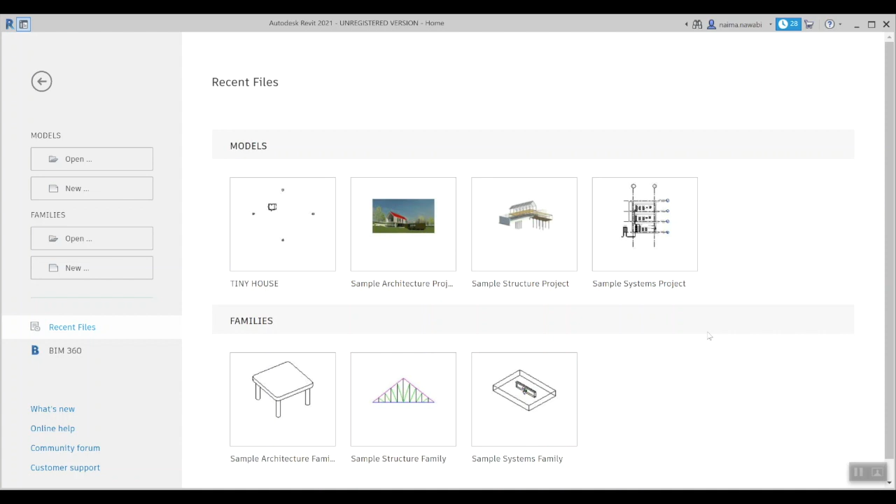I'm going to go back to our tiny house example, and everybody's tiny house is going to look slightly different. Specifically, if you look at our elevation markers, I'm kind of over here in this quadrant. You could be dead center, you could be all the way over here. We're all going to be a little bit different, but that's okay.

What I'd like to start out doing for printing is to show you guys how to add a sheet to the project. Over here in our project browser, if you pull down, you'll notice a new category called Sheets, and there are no sheets right now. If I go ahead and right-click on where it says Sheets, you'll see that new sheet comes up. So again, from the project browser, scroll down to Sheets.

There's no plus sign because there are no sheets. No sheet, man. Haha, sorry. I'm not though, I'll say sorry, but I'm really not. I'm shameless when it comes to my horrible jokes.

So right click and then new sheet. Right now we have one option, and this is called an E1. When we look for our paper size, remember size E is a 30 by 42, a really standard large size of paper. Another large sheet many of you probably use, maybe in CAD, is the Arch D, which is 24 by 36. But right now we're going to be using the Arch E. I'm going to click OK on that.

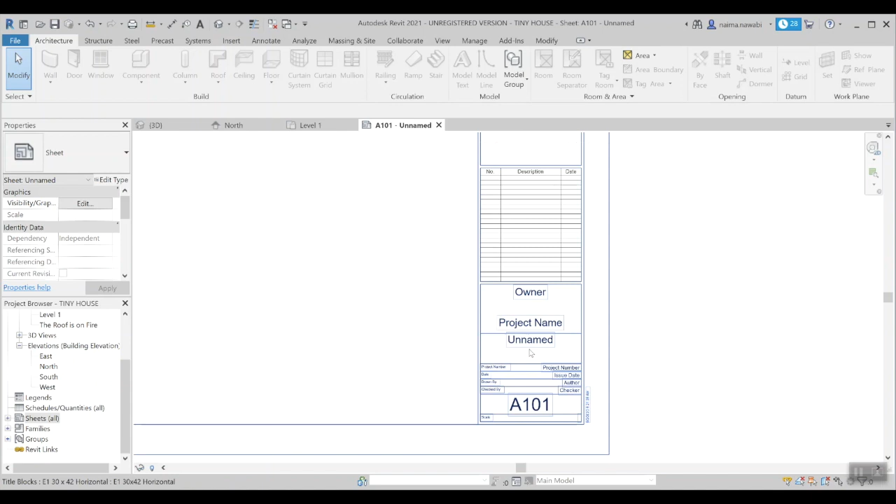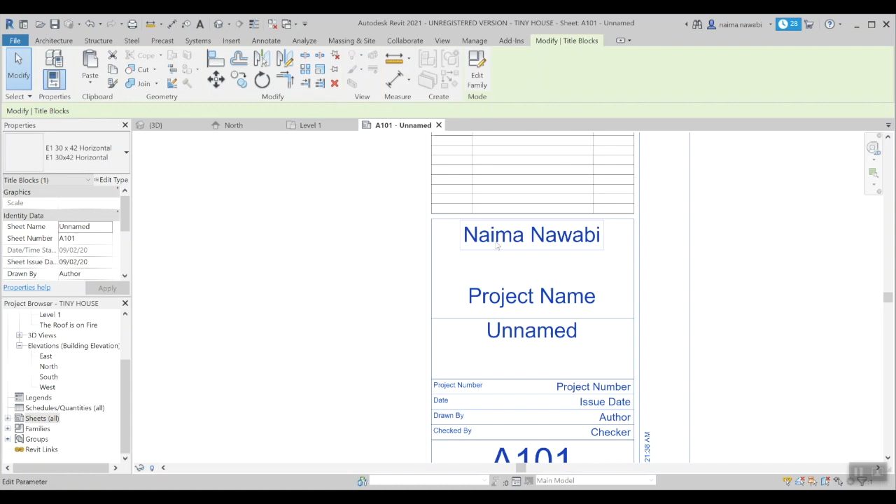Here's our sheet. Revit gives us this sheet that has a whole bunch of stuff already filled in. If you take a look at our schedule, around midterm-ish, right before midterm, we will go through how to customize this. But for now, under the owner, if you double click on it, go ahead and put your name there. I think it's so funny when people copy me exactly and put me as the assignment name, but just go ahead and put your name for now. And actually, even under project name, go ahead and put tiny house.

That's as much as we'll do with the title block for now. But here's our sheet, and again, it's 30 by 42, so it's 42 inches this way and 30 inches this way. It's really big, like the size of my 5-year-old daughter.

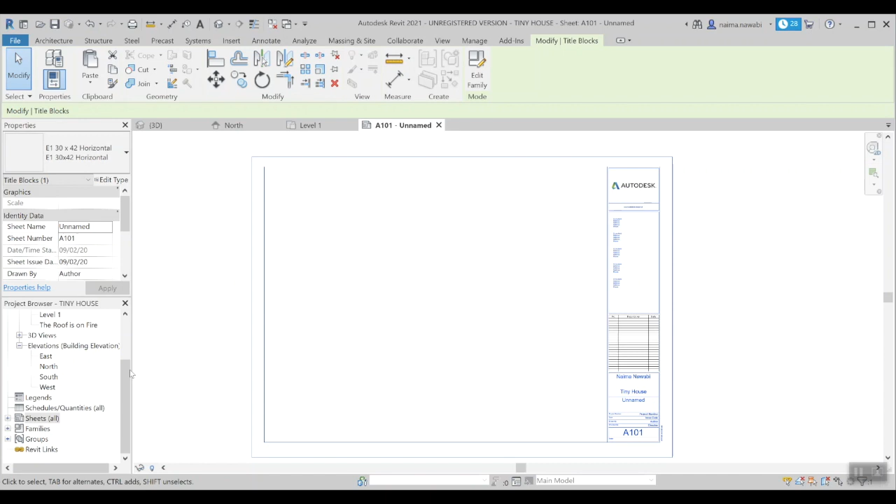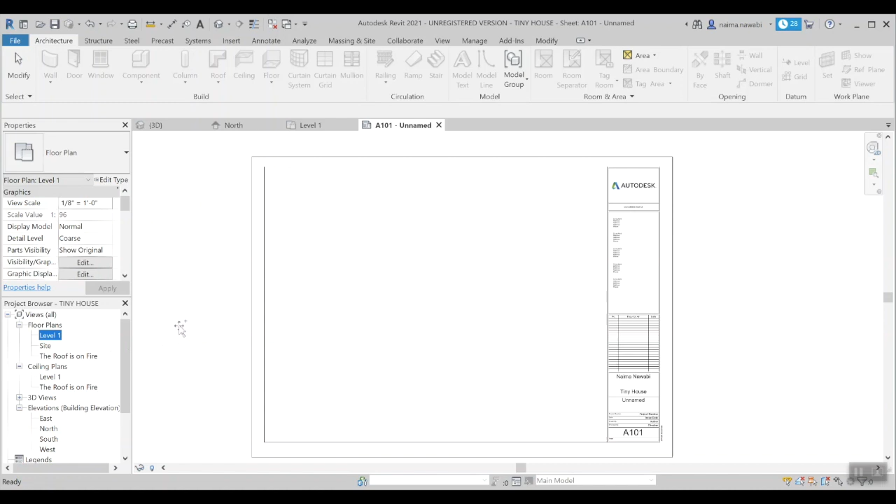What we want to do is pull Level 1 onto this sheet. These are views that can be dragged and dropped onto a sheet. So while I'm in the sheet, if I go to my project browser and click on Level 1, now I'm going to hold my mouse. Can you see that 4-sided arrow with the plus sign? It means where do you want to add this view. I'm going to come about center and drop it, and then you can see the view is here, but it's waiting for one more click to actually place it. So one more click, and there's my view. Level 1 at 1/8. Not bad, right?

When we first started, I said I was going to show you a few things. The first thing was how to get a sheet, we know our sheet, man. Now the second thing is setting up our view. I think it's silly to have this giant piece of paper with this tiny little house on it.

So what I'd like to do is actually click on this view, and I know this is going to sound scary, and then just hit delete. It does not delete Level 1. Level 1's still there, it just deleted it off of our sheet so that we can set up the view.

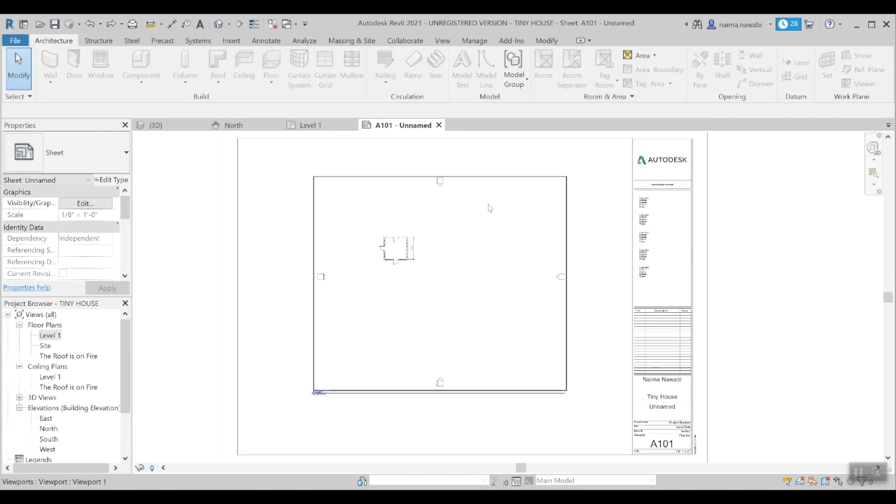I'm going to hit undo, and show you how to do that one more time. Again, click on the view, and don't double click on it, because if you double click, now you're actually in the view. Do you see how now my sheet's kind of grayed out? If you double clicked into the view, double click to get back out so you see this line around where your floor plan is. Then again, just hit the delete key. Level 1 is still there.

Once you've cleared it, double click on level 1 so we can go back into that view and set it up. I'm back here, and if you look at our project browser, I've still got my sheet here and level 1 there. Revit is just building our windows as we click onto the different views.

Now this is what I'd like to do for this view. This will take so many steps the first time you print, it's kind of ridiculous. But remember all the other wonderful things Revit does for us, so be forgiving. As usual, remember to pause and rewind as needed, maybe even slow down the speed. What we need to do is go into our properties over here on the left.

I'm going to scroll down - I'm on a tiny screen, so who knows how far I have to scroll versus how far you have to scroll. On my screen it's about a little past halfway, and I'm looking for the extents. That's what I'm looking for.

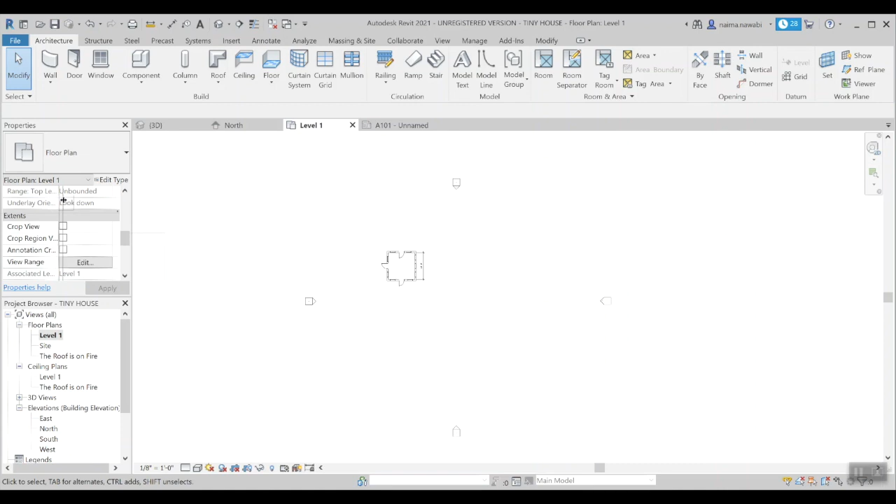I'd like to see here - let me scooch this over so you can see it a little more - but I'd like to turn on crop view and also crop region visible. It'll take my computer a minute, but that'll eventually turn on. If there's a little lag, don't worry. You can also hit apply, and eventually it'll turn on. Let me explain what this is.

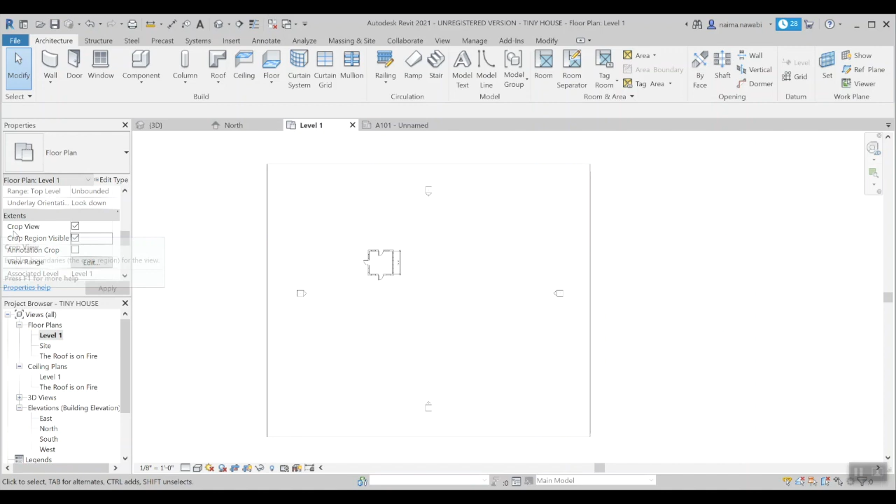The crop region visible is this box right here, and what this box is showing us is everything within this box is being printed. So remember when I said we were printing way too much for that giant piece of paper?

What I'd like to do first is take my crop region box and scooch it down nice and close to the house. And remember, if I ever do an addition on this house, I can come back here and adjust my crop region to be larger. Okay, so I went ahead and just scooched everything in nice and tight.

The other thing I'd like to do is turn on crop view - I'm going to leave that on, but I don't want the crop region to be printed. To me it just doesn't look very professional on the sheet, especially when you have more than one view - you're going to have a whole bunch of different squares. I just don't think it looks very nice.

So let's deselect crop region visible - that square is gone. Remember, we can turn it on later if you ever need to adjust it, but we want to keep crop view on. Now that we've adjusted our view, that's the second part. So far we've done 2 out of 3 steps: we've created a sheet, we've adjusted our view, and now the last thing to do will be to actually print it.

So I'm going to let you think about this for a minute - if we're ready to print, where do we go?

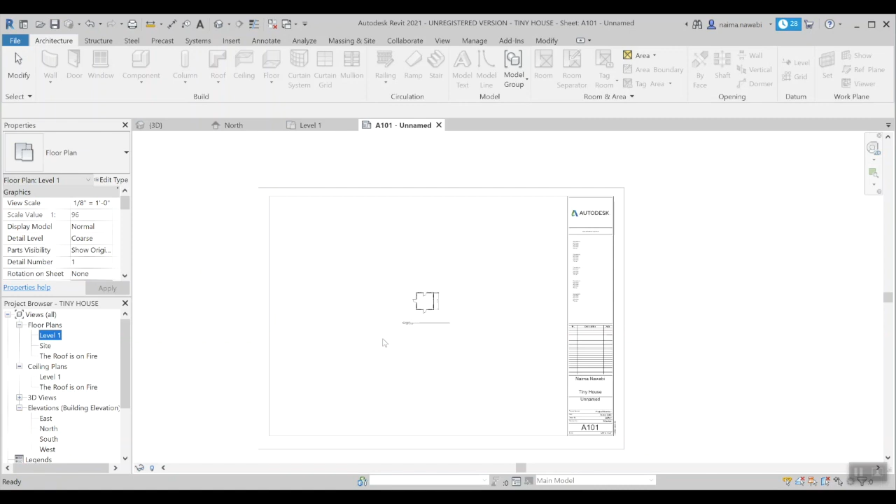Remember, even at this point we've only been working in Revit maybe less than a day. I'd say you guys are going pretty fast, like 2-3 hours, but less than a day for sure.

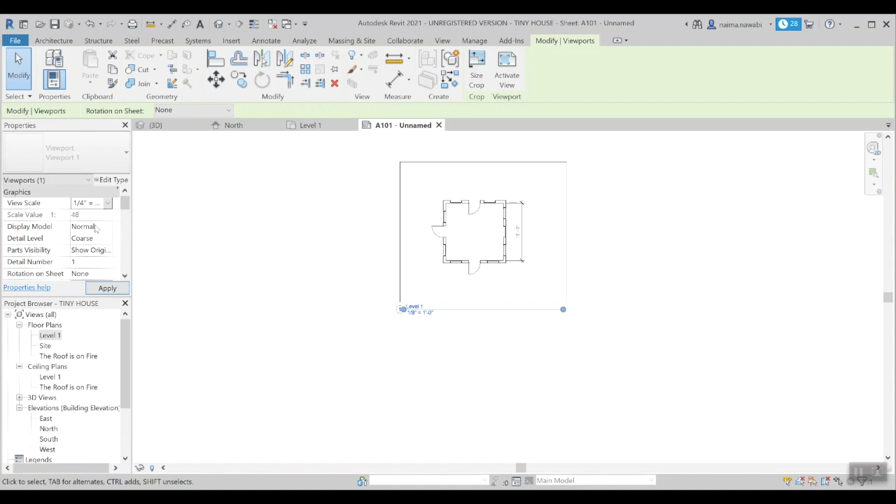Before we get to the printing part, I'm going to throw in a bonus thing I didn't mention when we started: view scale. View scale is so easy. One of the dynamic things about Revit is that when I click on this view, over here in the properties, it tells me the scale. It's at 1/8 inch. If I click on the scale, I can take it up to 1/4 inch, which is more of a standard scale for floor plans. It not only automatically adjusts the scale, but it automatically changes the viewport title to tell me it's a 1/4 inch. That's awesome.

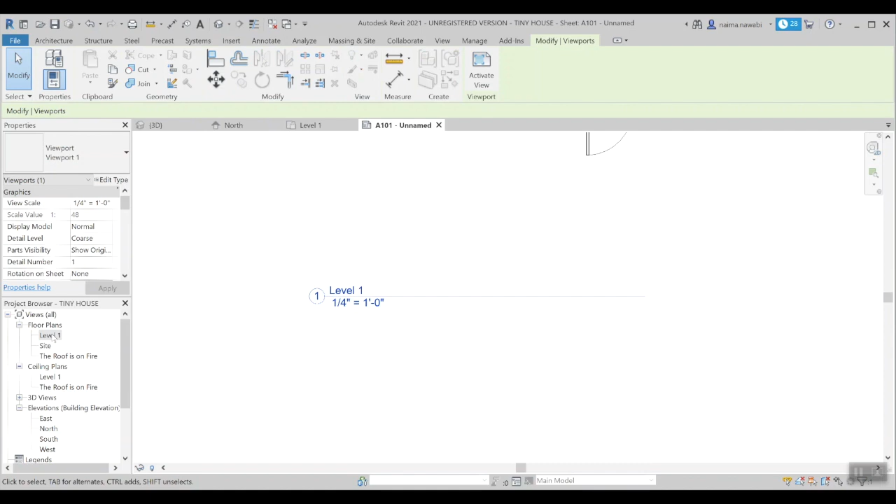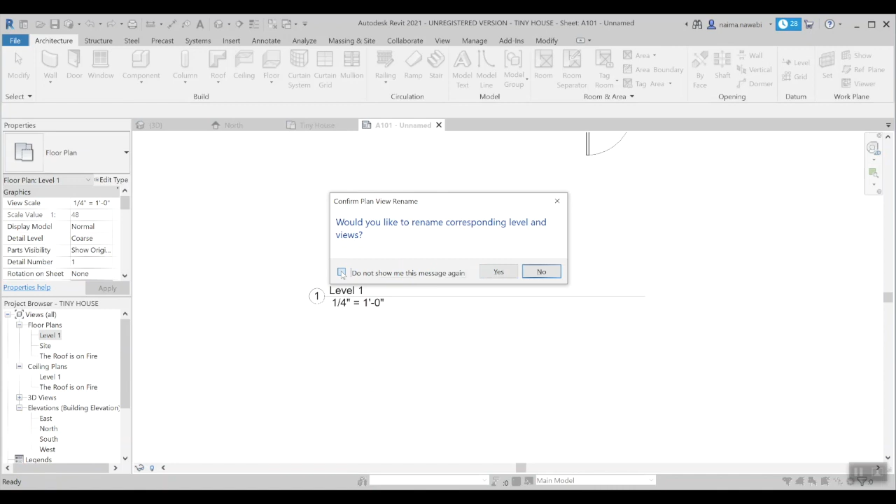Here's another thing that's awesome. Where it says level 1, if I come here to my floor plan and double click to rename it... oh, nope, it didn't rename it. Let me go back. I'll right click, rename, and change this to tiny house. It asks, would you like to rename corresponding level and views? This time I'll say yes, and click do not show this message again. Take a look at that—it does so much coordination for you. It saves so much headache, because if we were doing this by hand, think about all the other places you'd have to go rename it, but it does it automatically. It's pretty wonderful in that sense.

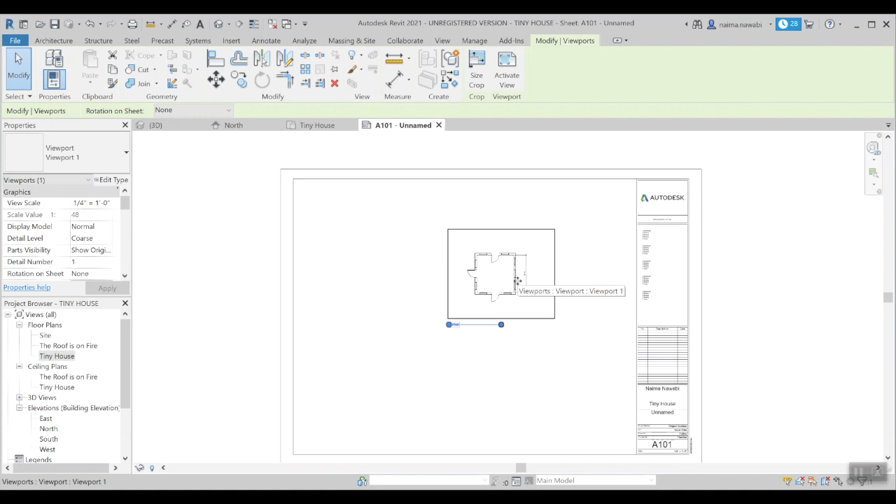Now, if you ever wanted to move the house on the sheet, first click somewhere on the actual model. Did you notice my cursor changed to a 4-sided arrow? Let me hit escape so I can do that one more time. Regular cursor, click on the actual architecture of the house—there we go. As soon as the 4-sided arrow comes up, you can move it.

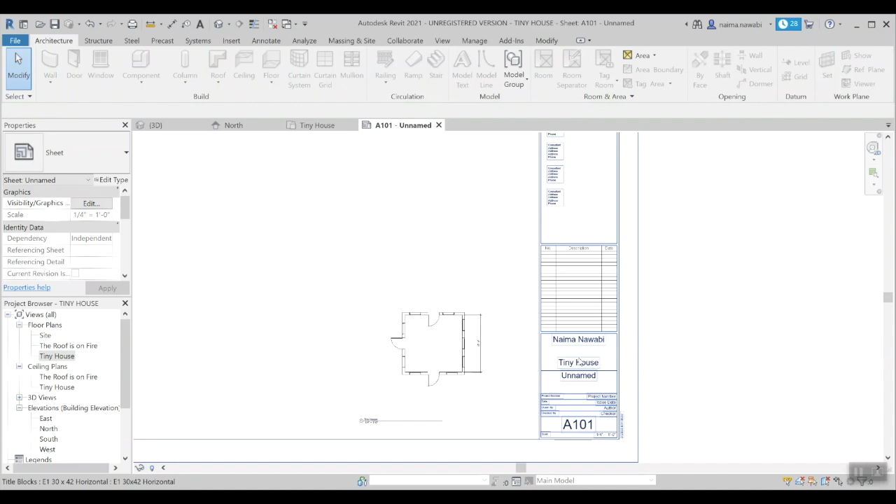I'm going to move mine to the bottom right, because if you think about a physical print—not a PDF you'll be sending me, but a physical print—think of it like a book. Most people start at the bottom right corner and thumb through it, so it's nice to have something right there ready for them. The way you move a view is just to click on it, wait for the 4-headed arrow, and then move it.

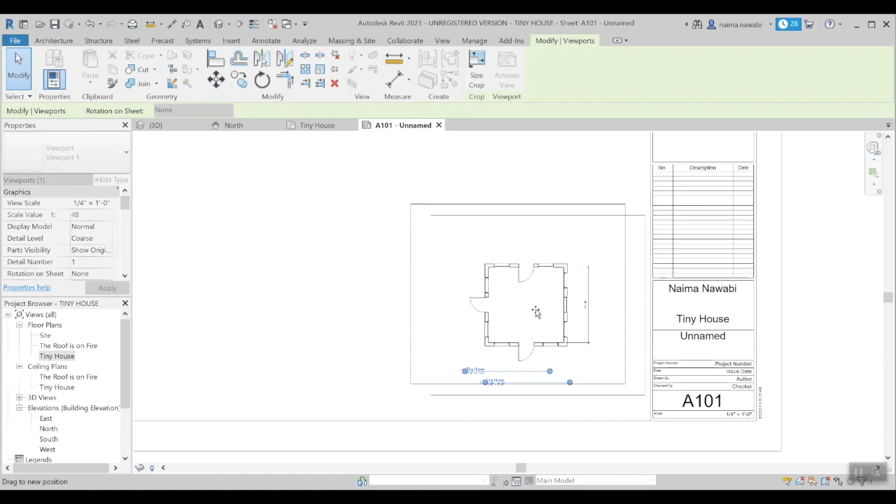Another thing you can do is move the view title. To move it, click on the line of the view title, and you can move it independently of the viewport, so I can get this nice and aligned with the house. I'll move the house and adjust the view title as I go. But notice I can't actually move the view title right now—as you move the view, you can also adjust the length of the view title to match your model. To move the view title itself, I click off so my cursor resets to normal, then click on it and move it independently.

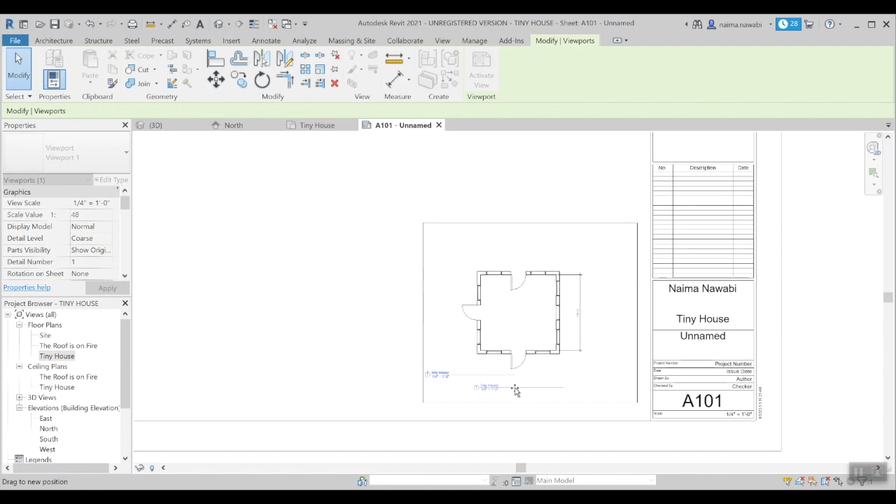Revit will show you when you've aligned to your model. Let me do that again—it just kind of snaps it. You see that blue line popping up? I'm on a laptop with not the best graphics card, so it's trying its hardest to keep up with me. There we go, I think my view is set up.

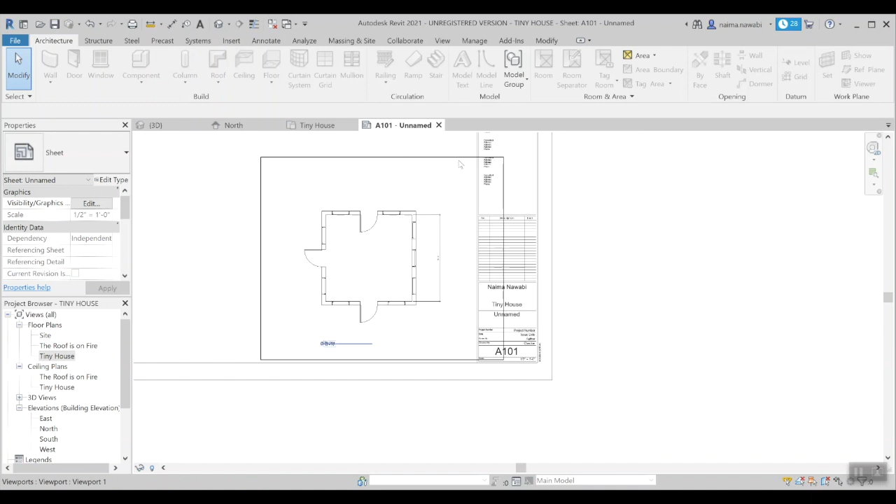If I wanted to, look what happens if I take it up to 1/2 inch—I kind of have to adjust everything one more time. See how I have a dimension coming off the screen? Let's be perfect and precise, it's our main job. So first I scooched it over. The viewport isn't visible, so this part's okay to overlap, I just didn't want the dimension going over.

Then I'll click on the view again and extend it out so it aligns with my view. Then I'll click on the view title and try to move it up if it lets me—there we go. I'm just going to move it up a little bit.

There we go. Now that I've completed all of that, I'm ready to print. But again, from the top, what I did is I started off here in my tiny house floor plan.

I came down to the sheet menu and right clicked and went to new sheet. In this specific template, there's only one sheet size to pick from. Do you remember what letter it was? Letter E. Anyway, so we created a new sheet, which was this sheet right here.

And I did a couple of edits on the title block. I put my name, I put tiny house, and that's just an easy double click to pull that up. So it's essentially one click to select it, maybe one or two clicks depending on how good you are.

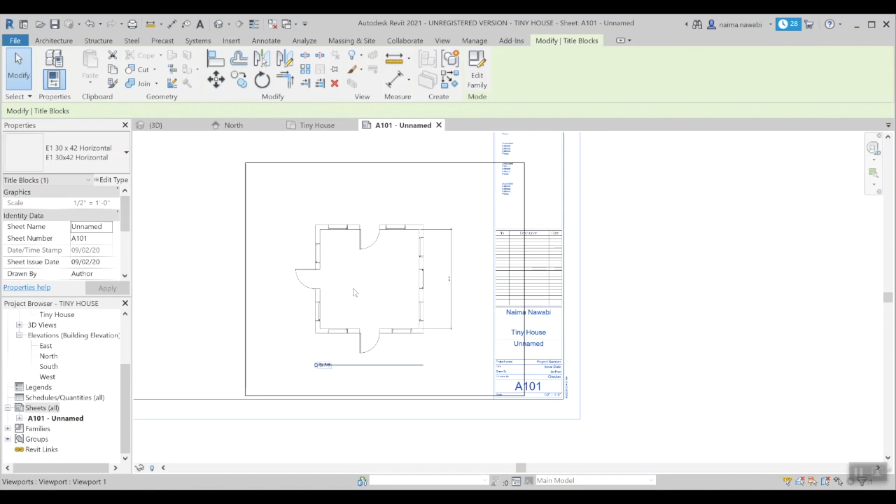And then to actually get the floor plan on here, again, it's a simple drag and drop. I can't put more than one floor plan, so look, if I try to drag it on, it'll be like, you already have this view here, you can't do that. So I'm just going to close out of it. But that's how you do it.

We also went back into Tiny House and we adjusted our view. Now over here in Properties, do you remember what that menu was called? It wasn't called Printing. It was called Extents. It's essentially setting the extents of your model.

Now we want crop region on to adjust, but we don't want it on when we print. That takes my graphic card a minute, so don't freak out if you don't see it right away. And then after you're done adjusting that, keep crop view on so that it actually crops the view to that size.

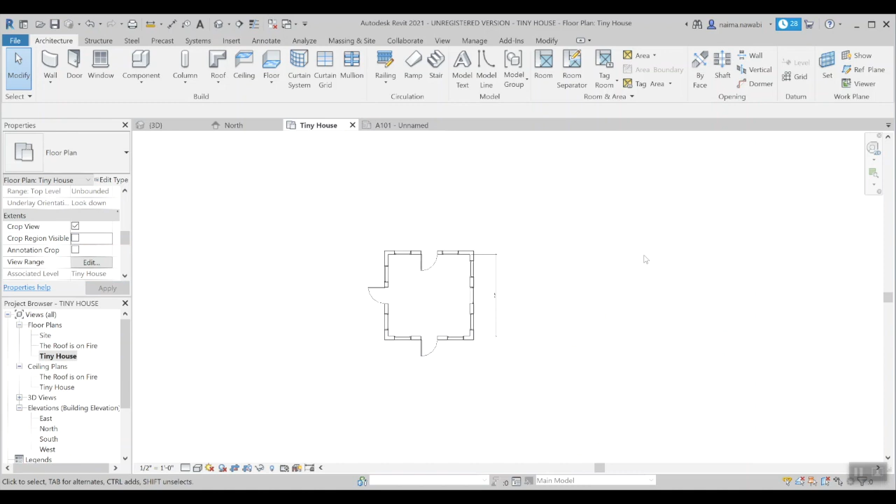And then over here, I moved it around and resized it to a 1/2 inch scale. I also adjusted the name of the floor plan to show you that it automatically updates here. That's another benefit of BIM modeling.

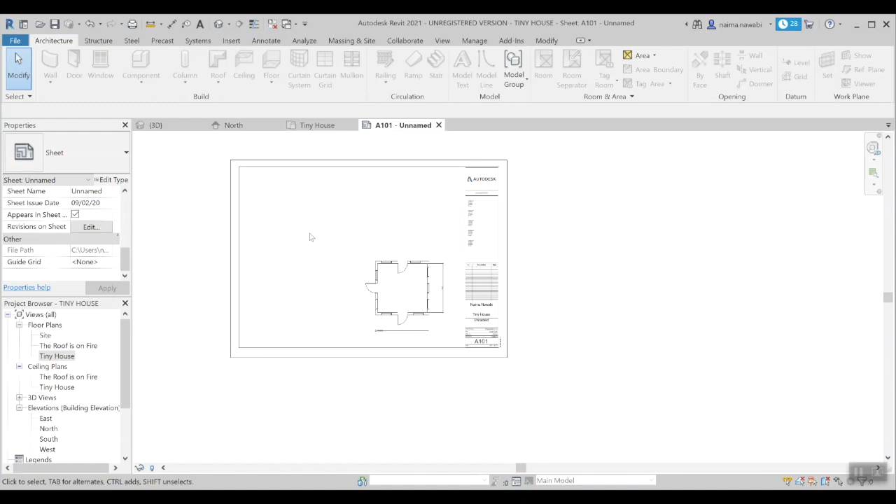And finally, after all that, I am ready to print. That'll be the last step that we do. We can actually send it to our printer. So if you are at this point and you haven't downloaded a PDF printer yet, please do that first.

This is the part where you will need one of the PDF printers that I suggested because we need the large paper sizes. So this next step is also a step where there are many little spots where you could get tripped up, and I'm going to try to help you along the way. So buckle up, here we go.

So in our sheet menu, there's several ways of getting here. You can hit this little printer icon, or Control P is also a shortcut. Or you can go to File and then Print. Either way, whatever you're comfortable with. I'm a control kind of girl, so I like Control P, and it takes us to this menu.

So the first thing you want to do is set your printer. The reason why you want to do that is unless you have the right printer selected, you won't see the right paper size, so make sure that's the first thing that you do. And then from there, we're going to go into the Settings Setup in the bottom right-hand corner. Go ahead and click on Setup.

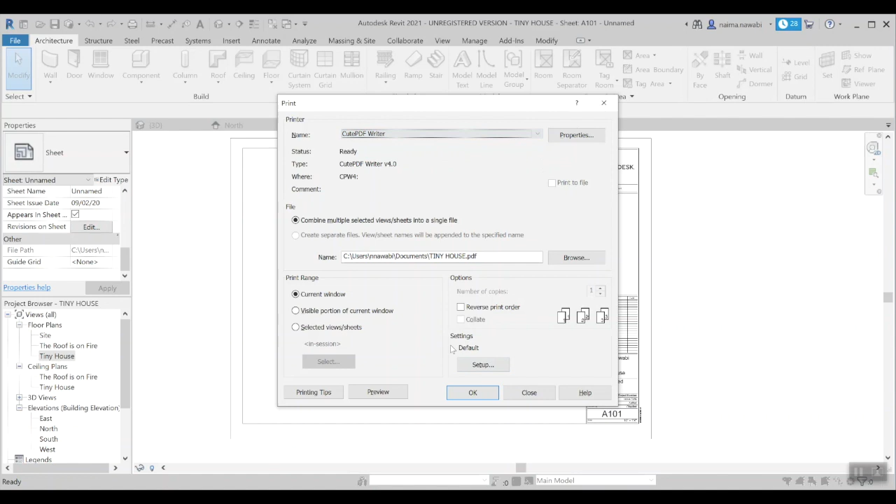And then from here, we are going to start setting up. So name default is just fine. Paper, do you remember what size paper we're working with today? It is the Arch E. We're going to start with Arch E, that's our 30 by 42.

We want to center it, and watch this because in other versions, this thing changes. We always want it centered. We don't want it to fit to the page. What that does is, let's say we accidentally picked a smaller size of paper, it'll shrink it down to fit, and that ruins our scale. So we do not want to shrink to fit. We always want to zoom 100%.

So here we go, this is the part that I don't love. When I clicked on zoom to fit, do you see how even though I said center, it's like, oh, I'm going to offset it from the corner now. No, I want you to center it. I wish they would change the order of this, I don't like that you have to go backwards.

And those are the only things that you need to adjust. So again, we made sure it was CutePDF, Arch E, and this could change depending on whether you're printing an 11 by 17, maybe an Arch D, but just set the correct size, zoom it to 100%, and then center it. If that looks good to you, go ahead and click OK.

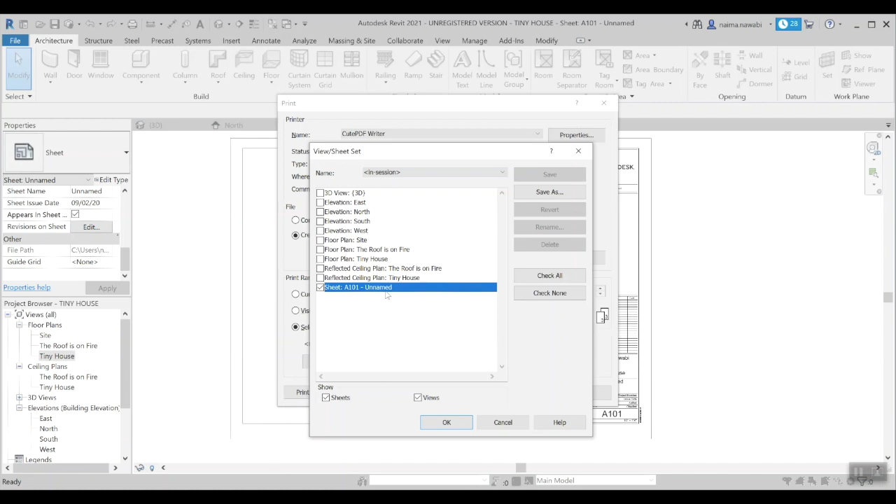There's one more thing I need to do before I hit send. In print range, what I need to do is go to selected views and sheets, and I want to select what I'm printing. These are all of my views, but I'm looking for sheets, so I'm going to select sheet A101. Even though I'm only printing one sheet today, in the future we're going to be doing several sheets as we build a set, making sheets for our other floor plans, elevations, interior elevations, sections, you name it. We're going to select all of them here from this menu. Go ahead and select A101 and then OK.

Do you want to save these? No, I don't want to save these yet because it's just one sheet. I'm just checking this. Once we've got that, we're finally ready to hit OK.

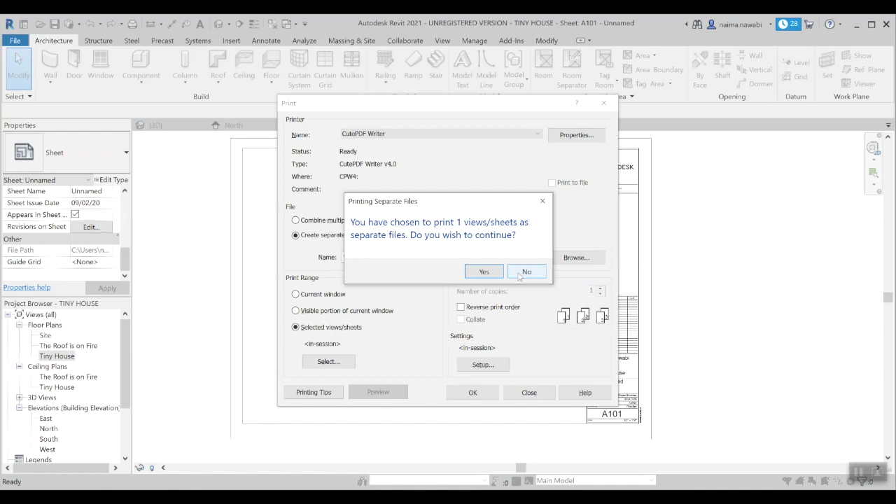This is a little warning that it's giving us. So if I had 10 sheets and I selected separate files, I could say, oh no, I don't want to continue, because I do want to combine them into a single file. So I'm going to go ahead and click on OK.

You can see it's thinking, and now Cute PDF takes over. Remember I told Revit where to go, what to do. Now Cute PDF is like, wait, where did you tell me to print? So I have to tell it again that on the desktop there's a Revit folder, there's a Tiny House folder, and I want to put it in here. I don't want to open it yet, I'm just going to save it. I don't like the whole automatic open when I'm done.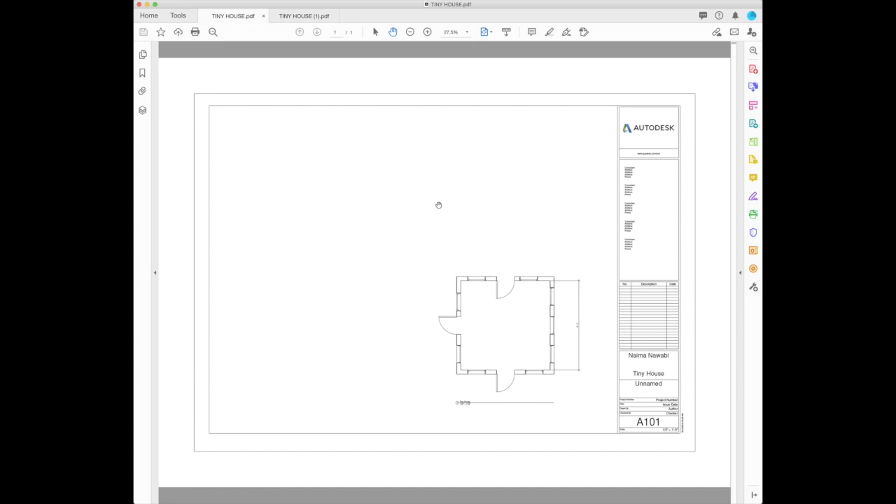Hopefully you guys caught that in the notes, and this is what your preview looks like. The other thing that's also really helpful is when you turn off fit to sheet, if you have too small of a paper size, you might get a crop view. Like if you look at where I'm kind of drawing, you might get just a small view like this. That's another indication that you may have selected the incorrect paper size. I'm going to keep this assignment open so you guys can keep trying until you get it right, like the first time, the second time. We'll keep trying until you get it right. And this assignment will just make future printing that much easier.

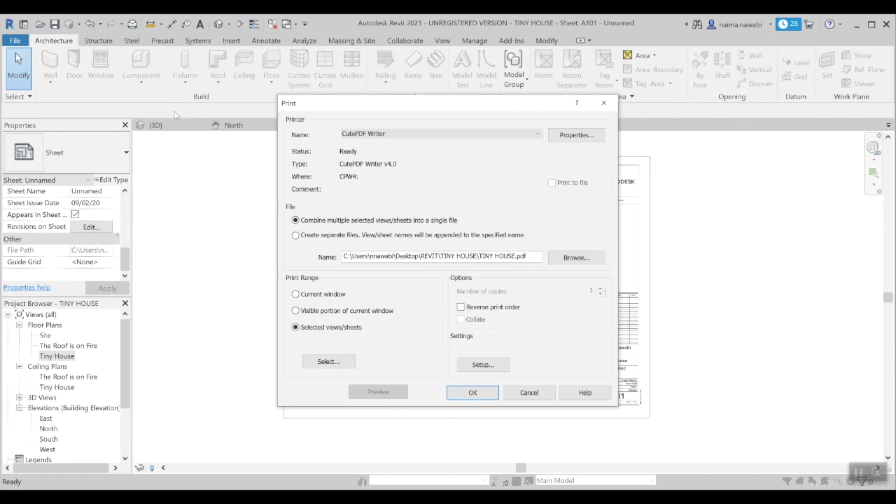Welcome back. So I obviously had such a good summer that I forgot how to print, or at least select my sheet size. When I go to print, what I needed to do was in settings, select Arch E. There is an Arch E1, and that'll eliminate the extra border around my sheet size that you saw in the preview. Go ahead and select Arch E1. I'll put it in the notes of the lecture to ignore me and select Arch E1 so that you don't have those extra borders that you saw in the preview. That'll take care of that.